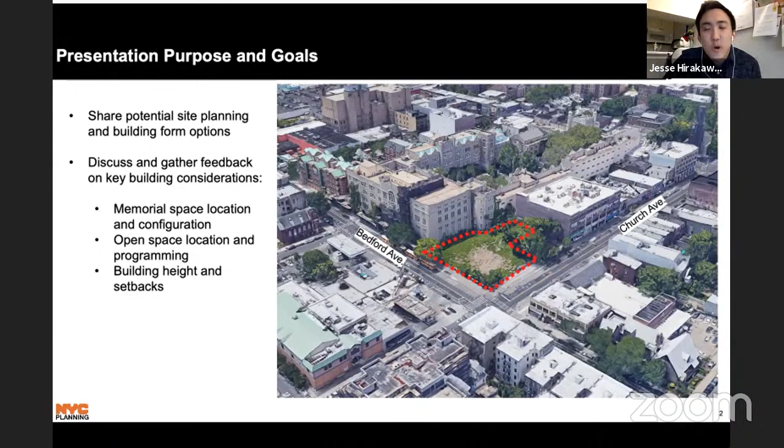We've done a lot of analysis and research on this area, and we're excited to share and discuss with you all. The purpose and goals of this presentation is to share potential site planning and building form options, but also to discuss and gather feedback on key building considerations to help form the future conversations and the RFP.

When looking at a site, it's not always about just building as much as you can or taking up all the floor. There's always a thorough analysis of site conditions and context before thinking about what is even possible. This unique site should consider the boundaries of the burial grounds from the 1855 surveys, and also respecting the locations of human remains that were found during the recent 2001 archaeological testing.

Since the site sits right against Erasmus High School, the landmark building, it's important to also have the building set back away from there.

In addition, not just for this site, but anytime we look at a site, it's always good to look at the existing context. What is the proximity to transit? What is the existing condition of the rest of the street? Is it a commercial corridor? Is it a residential corridor? What is the typical neighborhood character of the surrounding area? From there, we can start to think, well, where would the building go? We have a piece of land. If we want to put a building on here, where does it go? How tall can it be? We take cues from the different surrounding contexts to help determine these factors.

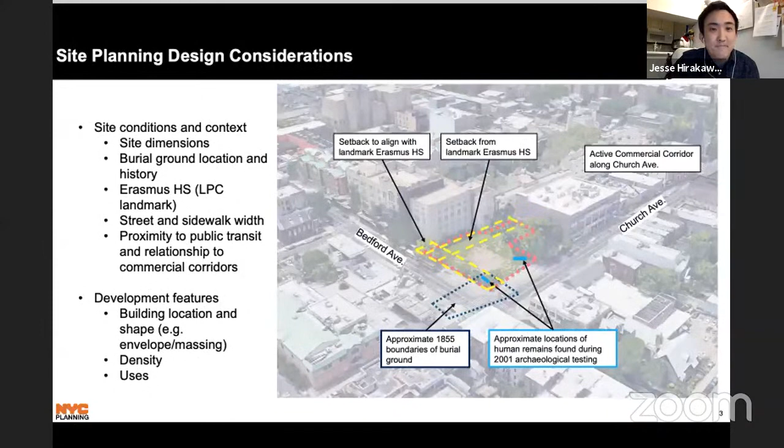Zooming in a little bit more, you'll notice instead of Google it's now more of a diagram look. Outlined in red is the boundary of the 2286 Church Avenue lot. We call this a corner lot because it has two street frontages on two avenues, and we see this as an opportunity to support additional pedestrian activity.

Another thing to note: lot 50 right next to it, in the black dashed lines, is a smaller lot. It's not part of the site, but it's currently vacant. We also recently checked the Department of Building Records and found there is a pending 4-story building that will be coming up.

Typically site lots are rectangles or squares, but this is a very unique and irregular size. If you notice, it's kind of this weird, not a typical square or rectangle shape. That makes it a little difficult to have efficient buildings and residential layouts sometimes. We'll explore that a little bit more later.

We've also queued to understand where the heights of surrounding buildings are, and that these avenues are 80 feet, which we consider to be a wide street.

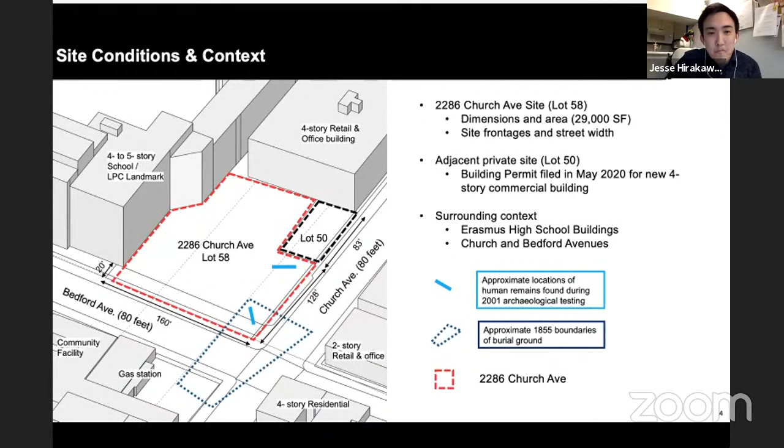This is a baseline scenario of what a future development could look like without any considerations or setbacks. I know I just mentioned a lot of considerations and setbacks, but this one doesn't factor in any of it. It's always important to understand what a basic building could look like before anything else.

First, we're going to be looking at some diagrams, so let me help you understand these right away. On the left there's this beige box with a bunch of lines, and those symbolize a potential building. Those lines represent floors. This one is actually showing a 9-story building.

Quickly, you can see how this does not meet any of the considerations we just talked about. There's no open space, no area for an outdoor memorial, and it doesn't align with Erasmus—it's kind of minimizing views. So it's always good to understand what is the first underlying potential available. If we had a building like this, it would have roughly 100 affordable homes.

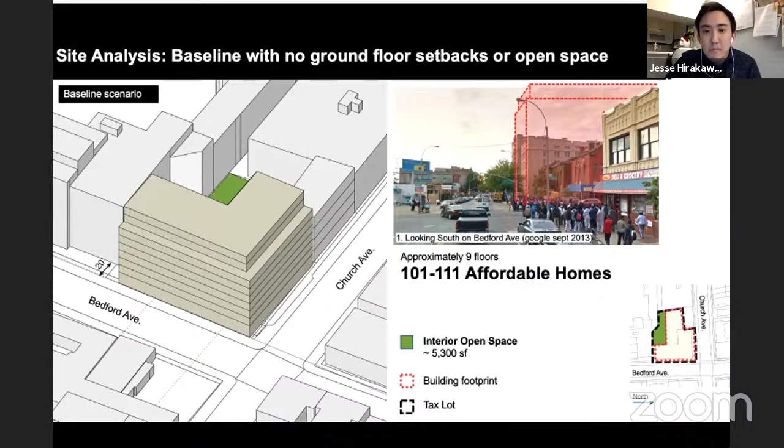Now that we've shared the background of the existing conditions and what a baseline building with no considerations looks like, we're going to walk through an analysis to help illustrate possible ways of developing the site with various important considerations. The 3 buckets of these conversations will include building setbacks, outdoor memorial and open space considerations, and building height and massing.

Before going into these options, I want to say that these are just preliminary site analysis diagrams for discussion purposes. Nothing is decided, nothing is fully designed. These are also going to be the topics in the breakout rooms where we'll be able to have more thorough discussions.

So the first one, building setbacks. What are some possible building locations in relation to the street, memorial space, open space, and the adjacent Erasmus Hall? First, looking for areas where we can push the building away from the street can create opportunities for larger sidewalks, passive programming, and different types of experiences for pedestrians as they approach the building. Just like in this example, the Greenpoint Library, you can see that the building is pushed back from the sidewalk, allowing for opportunities of some type of programming—in this case, landscaping and seating.

In our case, however, since Erasmus Hall has windows on the side of the building and is a landmark, we're suggesting a 30-foot setback, which is usually a good distance for light and air for both buildings.

Another setback option we're looking at is aligning the building with Erasmus Hall along Bedford Avenue, back 20 feet from the sidewalk, which will also allow opportunities for a larger sidewalk and open space, but also respecting the alignment of Erasmus Hall.

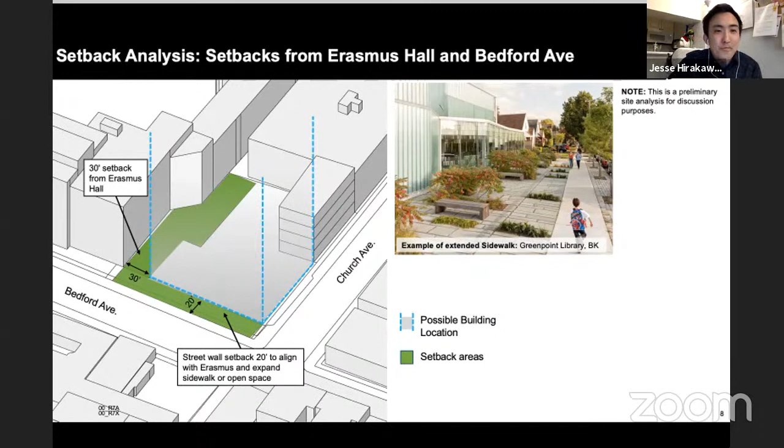In this analysis, we explored adding another setback along Church Avenue. Typically, we would suggest aligning a building with adjacent buildings, but this option was to consider respecting the historical burial ground boundaries on the corner, and also the location of the human remains that were found, generally where those arrows are pointing, along here and here, which we previously located.

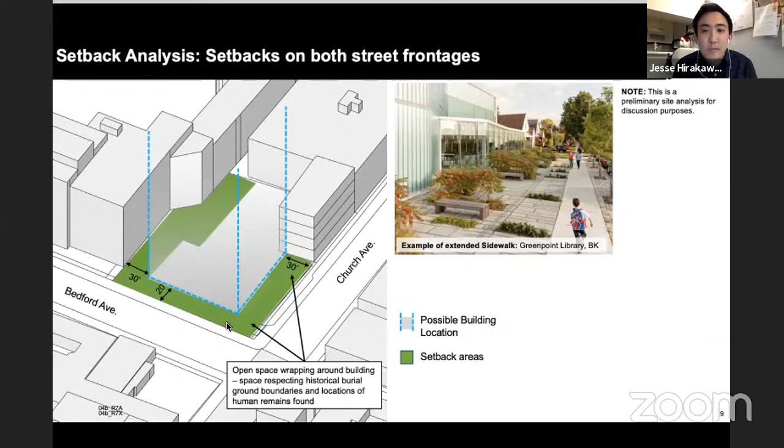Alternatively, there's another option if we were to have a larger setback between Erasmus and the new building. This type of larger setback between two buildings can create more of an intimate space, because it's a little bit less visible from the corner and it's kind of wedged between two buildings.

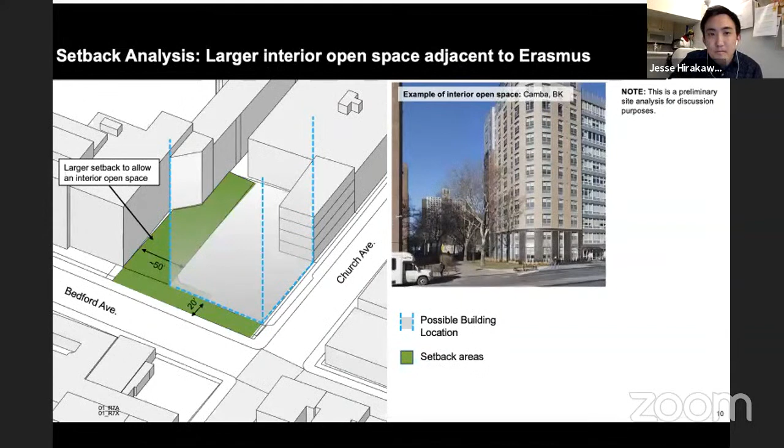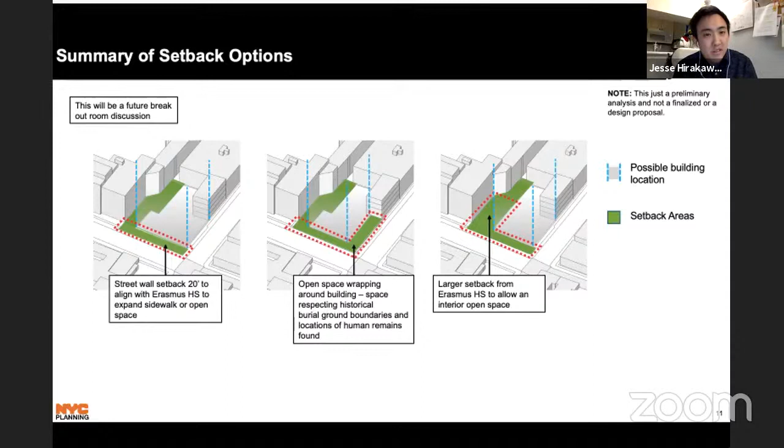Second section, outdoor memorial and open space. The questions we asked are: what are the potential site configurations for outdoor memorial and open space that can honor the historical burial ground and provide programming opportunities?

After getting a general understanding of where we can have setbacks and opportunities for open space, we can start thinking about where the prominent memorial space opportunities can be located. We came to about 3 options.

The first one is on the corner. It responds to the historical burial ground boundaries on the corner, and also noting that this example—which I think we previously looked at—the African Burial Ground Monument in Manhattan, is also a corner lot condition. However, this site in Manhattan is a lot larger than our site at 2286 Church Avenue.

A corner space, a corner memorial open space, can be celebrated. It's visible, it's accessible, and typically corner open spaces are relatively successful.

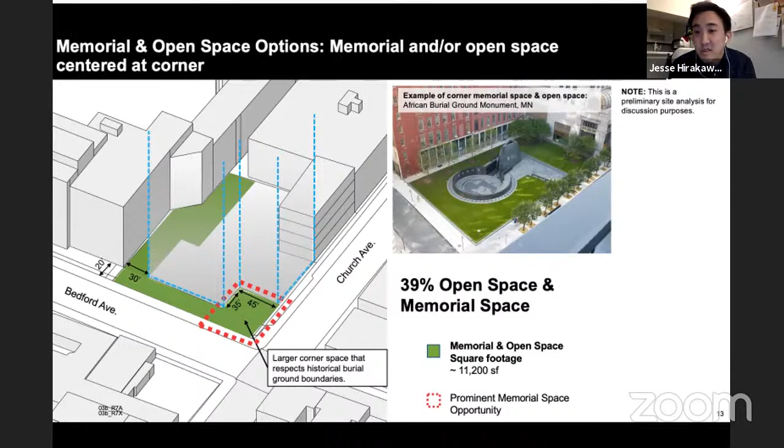Secondly, which works more with the setbacks that occur on both streets that respect the historical burial ground boundaries and the locations of where human remains were found—this prominent memorial open space would be along Church Avenue, noted in red.

Its location is right up against that smaller future building we were talking about, an opportunity for a blank wall—maybe a mural or something—but it's also a little bit smaller. It's visible from Church Avenue and it's welcoming.

I would note that it is on the northern side, so there may be a little less sun, since the sun is coming up from the south. It is along Church Avenue—remembering the character of Church Avenue, it's kind of more retail with some smaller offices, but it's always good to think about what that character is like along Church Avenue.

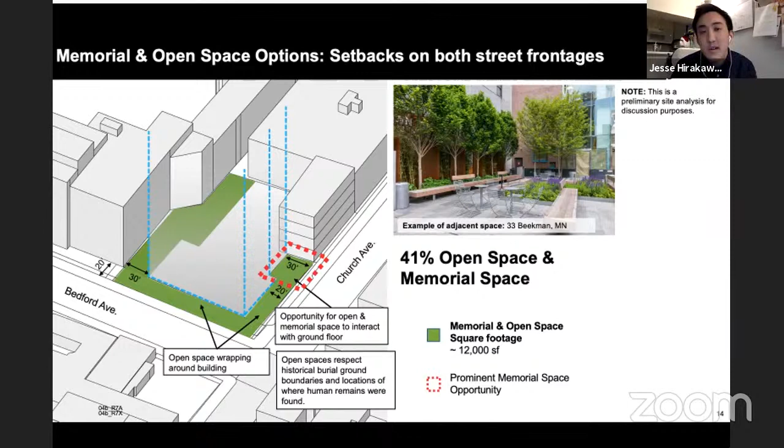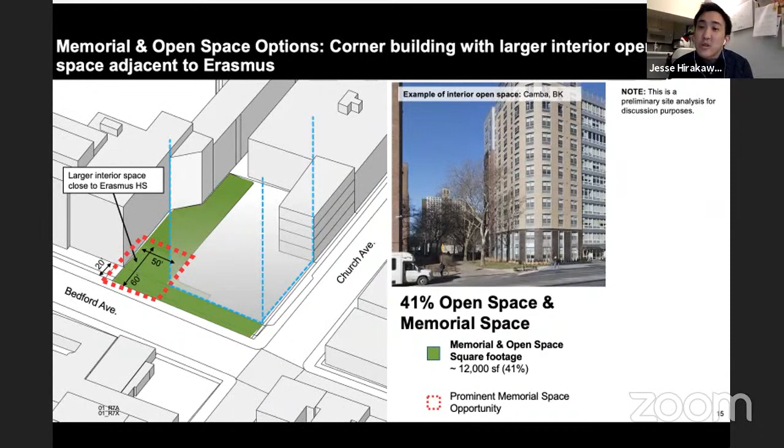Alternatively, the interior open space—when we were talking about that setback, the prominent memorial space opportunity in this option would sit within the larger setback between Erasmus and the new building. Since this is sandwiched between two buildings, the potential memorial open space would have opportunities to be a bit more intimate, given its mid-block setting.

In summary, of the memorial and open space options, there are a few options, as always. I would note that these all respect the historical burial ground boundaries at the corner, while the option in the middle additionally respects the locations of the human remains.

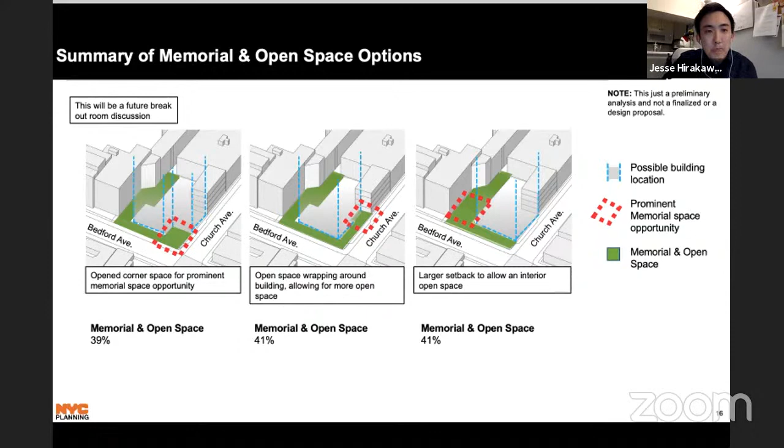And in the third section, building height and massing. The question we like to ask is, how does the size and location of an outdoor memorial and open space affect the building footprint, height, and number of affordable homes?

So this is just one example that walks through how the size and location of an outdoor memorial and open space can affect the building footprint, height, and number of affordable homes. You'll notice on the far left, the baseline building has no considerations—it would have approximately 100 homes, and approximately 18% of the site is open space.

That open space would, however, be in the rear. It's kind of unseen in this angle, but imagine the building in the front, sometimes there's open space in the back. Then moving on to the second image, when we push the building in a little bit and it creates an open space,

you'll notice there's a significant drop in the amount of affordable homes, from 100 to 65. Obviously, we're reducing the amount of building, so the homes get minimized. However, it does start to address certain memorial and open space goals.

Then on the third image on the far right, if we were to add a few additional floors to the building, there is a substantial trade-off to have more affordable homes. So when considering adding a few floors, there are a lot of considerations when thinking about how tall a building can be.

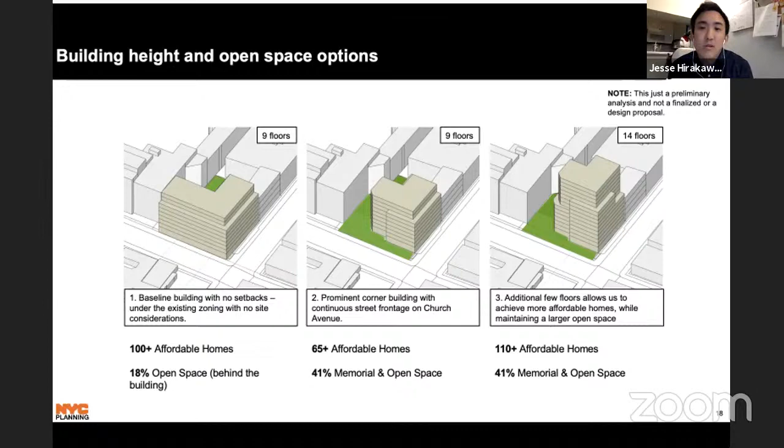So then looking at how these apply to different setback and memorial open space consideration options, we started to consider how those few additional floors add on. Once again, these are just preliminary analysis—nothing is final in these options. These are just diagrams to help facilitate conversations.

Adding height and a few floors allows us to achieve more affordable homes while also maintaining larger open space and memorial options. I would also note that it doesn't have to be a 14-story building, but I placed Caton Flats as an example of that, which is a couple of blocks away. Some of you may be familiar with this building, but just so you can understand what 14 floors feels like, Caton Flats is also a 14-floor building.

And that's all. Thank you so much. Are there any questions?

Yes, how you doing, Jesse? Thank you for the presentation. Hello, question for the third example that you gave, in which you're going up to the 14th floor.

How many stories would that be? I'm sorry, are you talking about the one showing right now on the third image? Yes, the third image. Yeah, these considerations are kind of going back and forth between a range of 9 to 14 floors. Okay, and because I'm trying to visualize this tangibly, how many stories would that be, roughly, in your estimation? Oh, that is 14 stories.

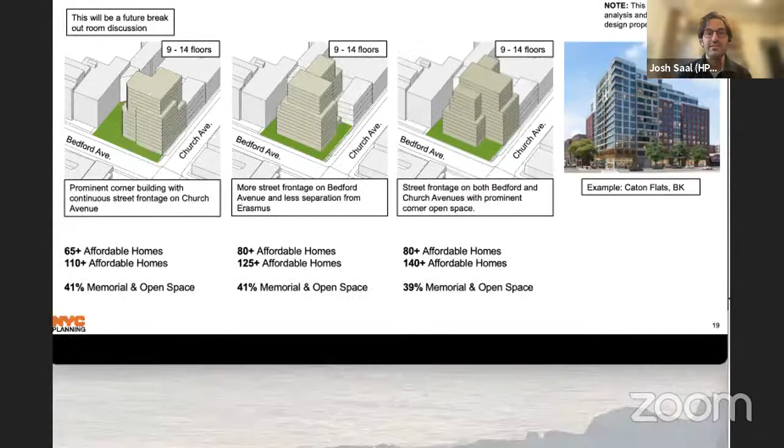So if you had more 2-bedrooms and fewer studios, some of these numbers might shift, and vice versa. I don't have a live calculator to do that kind of shift, but any HPD program we'd be doing that's not geared only toward seniors or supportive housing would have a mix of studios, 1-bedrooms, 2-bedrooms, and larger family-size units, depending on preference. I would imagine the larger mix would probably be 1-bedrooms and 2-bedrooms.

Sorry, would the larger weight be toward 1-bedrooms and 2-bedrooms? Yeah, we have a maximum — we're always wary of providing too many studios in any of these buildings. There's almost a maximum in each of our programs for the amount of studios and 1-bedrooms, and a minimum for the number of 2-bedrooms and larger, and that varies by program. We can send that information later if that's helpful.

I think I can add to that detailed answer. What we like to do when getting a ballpark estimate of units is use a number like 860 square feet as a general average, since some units are below it and some above. For quick exercises like this, since nothing is determined yet, we just pick 860, divide the total square footage by it, and say, this is roughly how many units we can get.

I know this is a very preliminary stage, and sorry Sean, this will be my last question — has any thought been given to the demographics of Flatbush in terms of family size, and what the community has expressed in terms of housing needs? Or is it too preliminary for that?

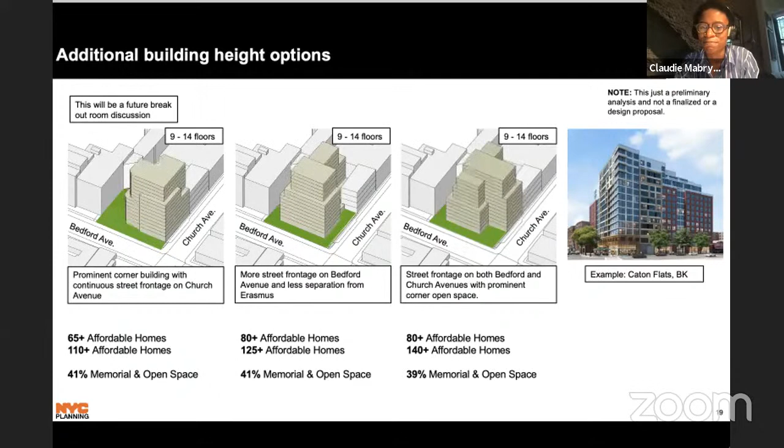Thank you, and no apologies necessary. They were good questions, and I benefited by waiting to hear them because there's a lot of good thoughts wrapped up within them. Nice to see you again, Josh. You made a really excellent and thorough presentation to my board last night. And nice to be with you on the screen again too, Jonah.

I do want to make sure it's said out loud: these schematics, these potential schematics, don't reflect current zoning, do they? There might be a zoning change application tied into some of these, like a 14-story might not be as-of-right development, correct?

Yeah, that's a very good observation, and that's definitely the idea. We didn't want to focus on... let me back up. The baseline building we looked at from the very beginning was just kind of an L with no consideration to open space. That would reflect the existing zoning today, which is a C44L, an R7A—very technical—but that allows for a 9-story building. If we were just to develop that corner with no considerations, you could build a 9-story building. So that's what the underlying zoning is.

From there we were thinking, okay, if we consider any site on any corner, what can this area handle in terms of height and density? We thought it could go up a few more floors because the streets are pretty wide—it's a wide street, an active corner, a location of transit, and also considering the height of surrounding buildings. We thought around 14 stories, though it doesn't have to be. This is just for discussion—we thought 14 floors is something that would be comfortable in this area.

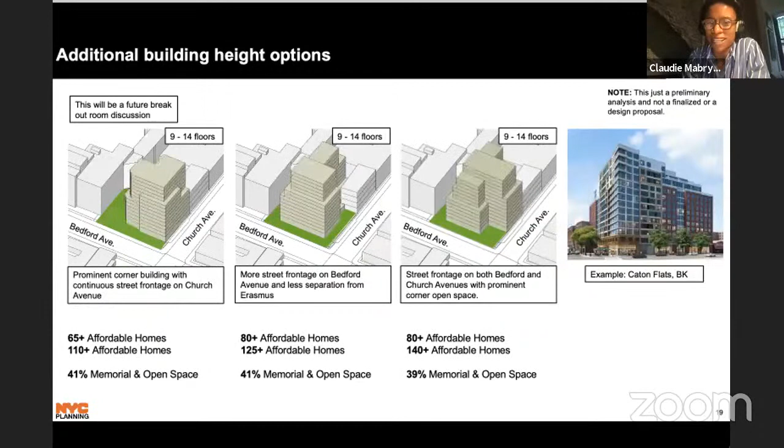Thank you, Sean. And I also just wanted to piggyback that Sean did bring up the zoning topic. And so that's something that is just going to be continued to be examined, knowing that zoning also comes with its fair share of community engagement as well. That is something that will be continued.

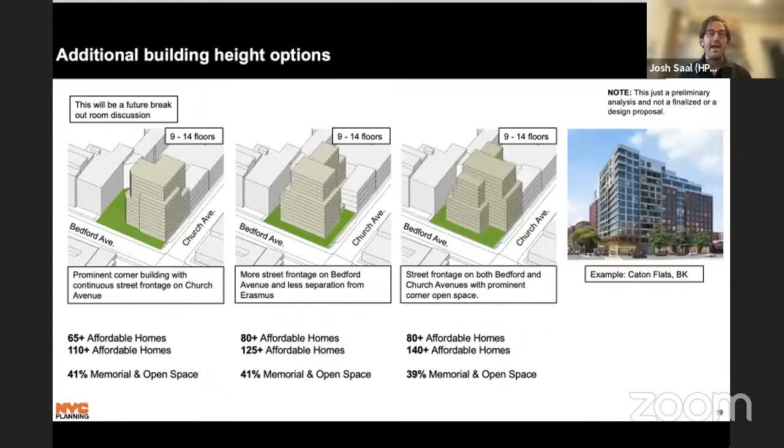Claudie, if I can just add a note on this, I don't want to stick too much on zoning, but really when we engaged DCP before this meeting, we tried to take what we heard from the previous task force sessions about the importance of outdoor space, the importance of honoring the location of where the burial was, and creating a space where you can get that sense, that this is not just one of those baseline sites that we showed in the beginning. How do we achieve all these goals, and how do these trade-offs work, is really what we're thinking of here, and what we asked DCP to come up with some ideas for discussion today. I'll let Chris take it from there, or Claudie.

I might be jumping the gun a little bit.

No, that's great. Thank you for that context. We have time for maybe one or two more questions if there are any. So just wanted to check if anyone else had a follow-up question to the presentation.

I think for me, I just wanted to clarify to the rest of the group why my question was really around the size of the units. Because as we look at trade-offs, will that number change if we say we want a building that's not higher than 9 floors, so it matches more the land and the streetscape, and we say okay, we'll get 65 units, unless it's turned into home ownership like in the last meeting, that we'll get 65 units at 9 floors.

As I think then about unit size, I know that number can drop below 65. So I was trying to figure out, can it drop below 65, or is 65 as low as it will get, or is it the maximum? That's really what I'm trying to figure out, just so everyone can really know what other trade-offs are in place as we make these decisions.

Thank you so much, Naima. And definitely trade-offs is a big mechanism to examine here across the different explorations. We are going to talk more about that throughout our dialogue today, but thank you for bringing that up. Naima, I do want to jump in for a moment to help us frame our discussion as a group, as we start talking about our priorities.

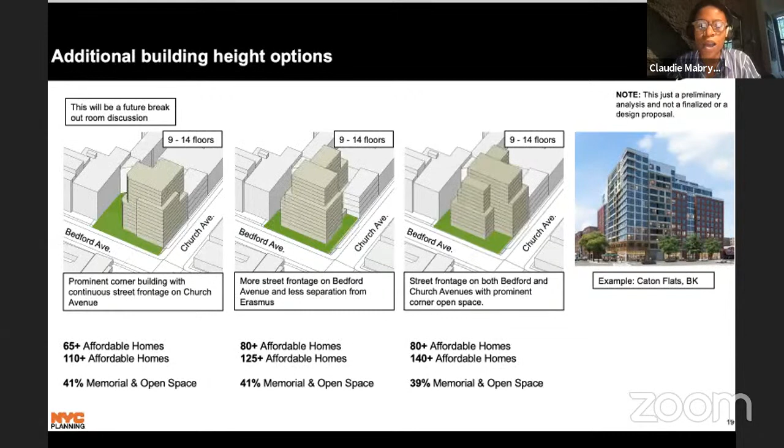I thank you for your flexibility and patience as we digest all of this and what it can look like for our site. We're now going to transition into our first dialogue around site planning and urban design. In Jesse's presentation, he gave us an overview of setbacks, open space and memorialization, and the massing of the site and what opportunities could lie here.

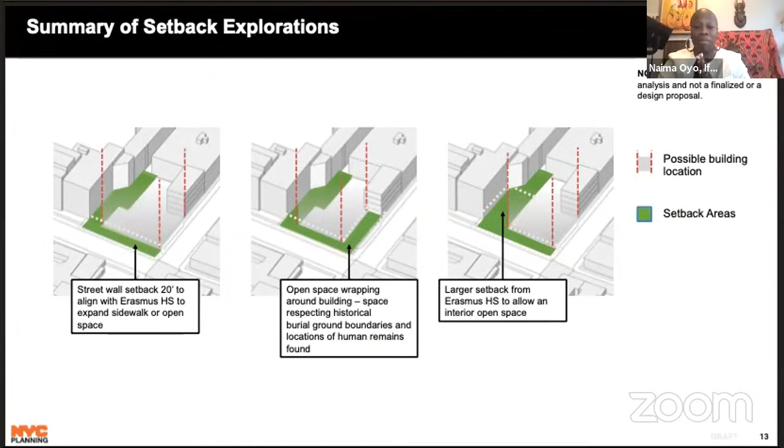Looking at these designs and thinking about what Sean was saying, the garbage becomes a really big part of it. But the other thing I was thinking is that this is kind of setting the tone for what happens next, because development is coming whether we like it or not. So if we're not carefully considering what's happening here, how do we make sure that moving forward, whether we're doing setbacks or not, there's careful consideration? I'm looking at this with a forward thinking lens, that this is setting the tone for what's going to happen on that block as time moves forward and as buildings sell, as they will inevitably do.

Robin, with that, can I ask you to elaborate as you think forward? Because I think that's a helpful perspective. What's coming to mind for you as you think along Church and so on? I just want to know, I think it's a helpful perspective to think about.

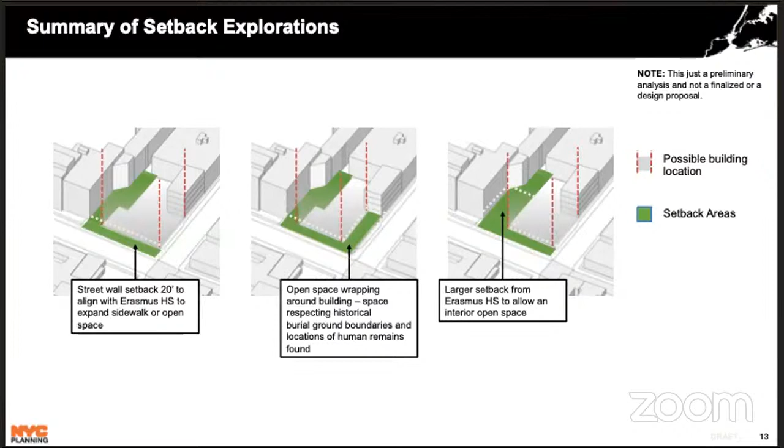Sure. I mean, what's happening, Sean can speak to this better than I can. However, once a property goes up for sale, usually there are multiple buildings, especially looking right now on Flatbush Avenue. There's almost a quarter or three-quarters or half of a block that is boarded off right now. So having that being boarded off the way it is, we know that there's construction coming, we know that there's going to be new buildings coming in.

So I'm saying this is what's going to happen here. There's going to be construction coming down the line. We know that buildings are inevitably going to sell along that same corridor, because most of them are low buildings. So either they're going to sell or they're going to sell air rights. I'm just saying this is really setting the tone for what's to come down the line. Yep, that's helpful, a helpful perspective to keep in mind.

So I want us to just come back to the open space and memorialization piece again, and I've moved on to those slides. Looking at these again, Naima, who jumped off, but something that's truly resonating with her is this cultural space, and open space would help to promote and provide for that. So there are a lot of opportunities and benefits with maximized open space. But I'd love to hear, does anyone have any gleanings towards any limitations or considerations to keep in mind with what comes with more open space? Also knowing what Sean just shared about garbage as another example that intersects into the open space dialogue and where the memorial is.

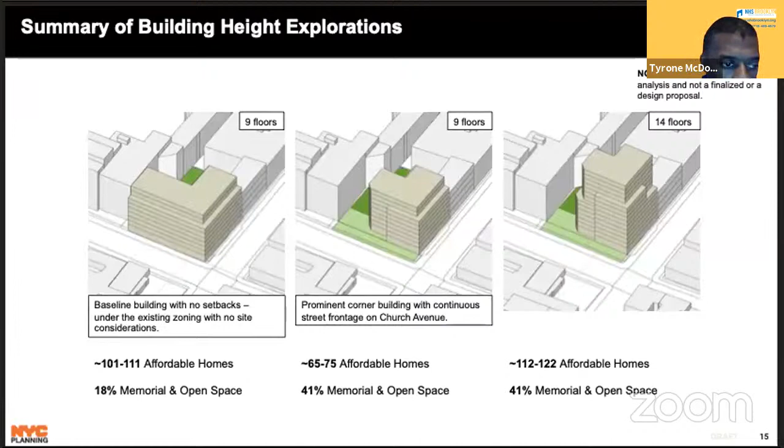One question I have — and I think Natiba and also the Reverend raised a good question regarding affordability, so that should be noted. Another question is whether higher buildings would affect light in the open area — how would that impact the open space? That's another question I have, as far as sunlight. Would it make much of a difference at nine floors as opposed to 14 floors? Maybe someone from HPD or DCP can jump in to provide some framing on the implications of light from a higher building.

Yeah, I think that's a great question. Considering the difference between 9 and 14 floors - right now there's an open lot with no building, so essentially any building we put there will create some type of shadow regardless. I think the difference between 9 and 14 floors would require a more thorough analysis, but my quick assumption is that there probably might not be too much of a difference. I don't want that to be a solid answer though.

Just to add for a second, when you're talking about the effect on the open space, are we talking about potential open space on the site as shown here? Because the amount of sunlight would differ if you put the open space between the two buildings versus on the corner of Bedford and Church. My understanding is that the height wouldn't necessarily affect that, because of the orientation of where the sun is.

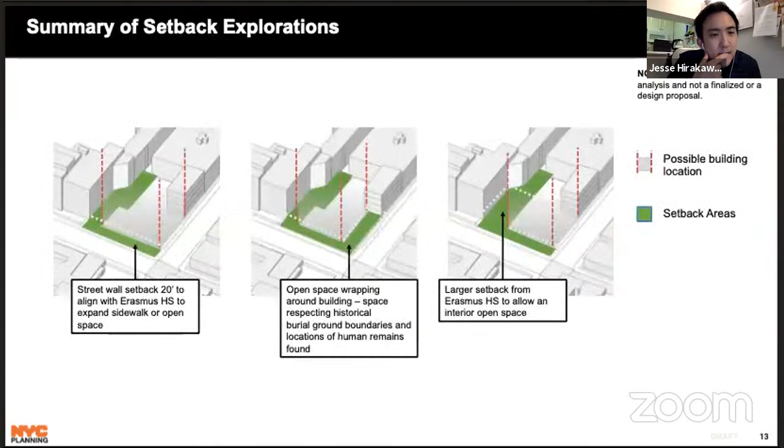Is there a way to go to the different slide that shows the 3 options? Maybe go back - the one that emphasizes the memorial spaces. Oh yes, here we go.

This one, right? So maybe I could quickly walk through thinking about sun and shadow on the memorial space, from left to right. North is on the bottom right of the screen, so the sun would be coming from the Erasmus side, on the south. As it's coming, the option on the left, the corner open space, would probably have the most access to AM morning sun, because it's facing where the sun comes up and isn't blocked by any building.

But the option in the middle, since that's on the north side, on the north angle, would probably have the least amount of sun. And for the third option, the one favored by some members of the task force, the only sun blocking that open space would be the Erasmus building. You could go there right now and see how the sun reacts to that space due to the Erasmus landmark building.

If that helps answer your question of shadows - yes it does. But regardless, putting a building there will create some form of shadow on Church Avenue, because right now there's nothing there, and if something comes up, it's going to create a small shadow on Church Avenue. Thank you, Jesse, that's very helpful.

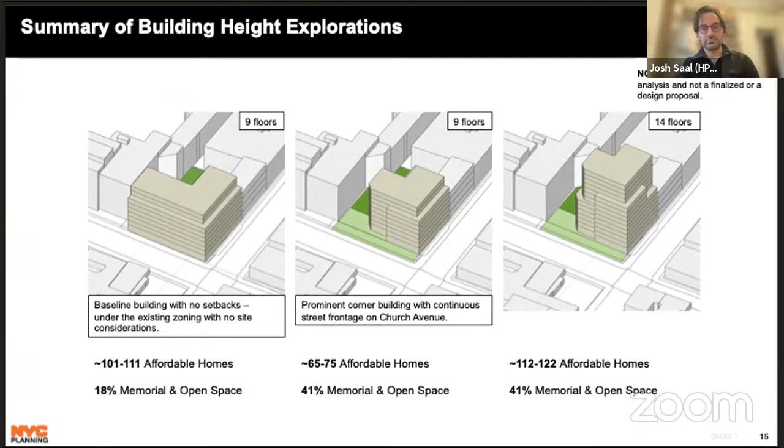Since this is an affordable component and near transit, there's a reduced amount of parking required elsewhere. There may be an assumption that parking would be accommodated in the cellar below, so that wasn't considered above ground or wouldn't affect the open space or memorial space. But if parking is a constraint, there could be future discussions about how to reduce the requirement if that's a priority.

Lauren, we saw your hand was raised, and after Lauren we'll move on to a break, but we can keep getting questions waterfalled to us in next steps. So I'm going to let Lauren close us.

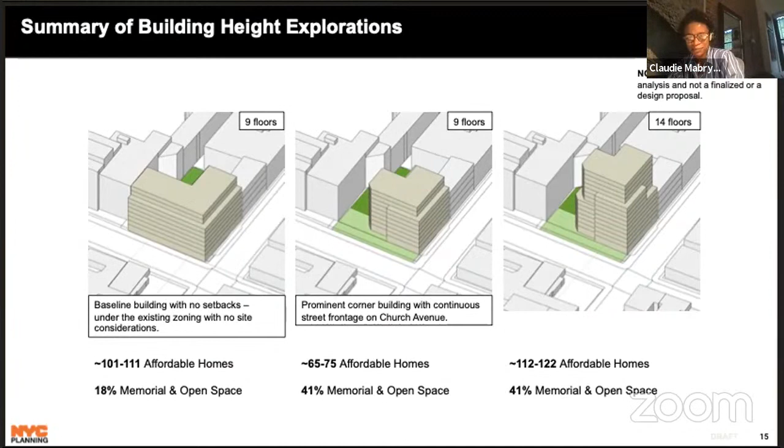Thanks, I'm going to jump back to the interior open space discussion. While we were talking, I jumped over to Instant Street View to see what it looks like. Looking at the lot, Erasmus is a substantial building, about 4 to 5 stories. In the photo on Street View it's completely shadowed, which gives a different impression than the rendering from a bird's eye view. That has a feeling of being more open, but from street view it looks like it might feel like a tunnel. I just wanted to throw that in.

Lauren, that's a good point, helpful for us. If you haven't been back to the site, it might be something to consider before we finalize or refine the recommendations back in, future in June. It's just something that might be helpful as we move forward.

Can I make a suggestion? Maybe for the next task force meeting - I know the next one is optional, more about brainstorming for outreach - could we do it at the location so everyone has a chance to appreciate the feel, if people feel comfortable doing that?